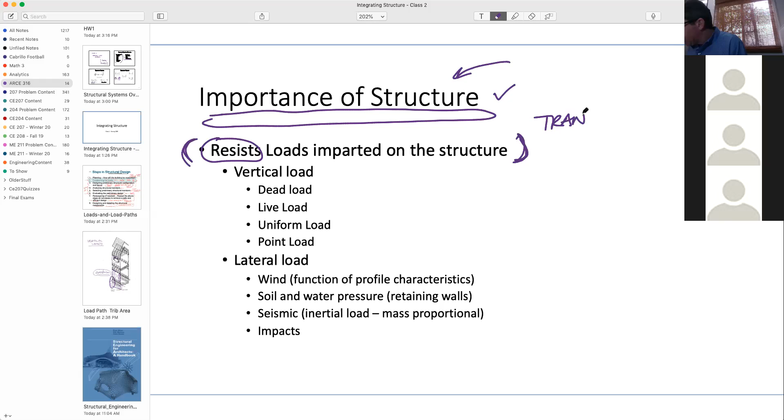Factually, a structure resists loads imparted to it. You could say resist, but really what it does is transfer loads ultimately, and successfully, to the foundation. That's really where those loads need to get to. So think about it in terms of resisting, as in being able to withstand them.

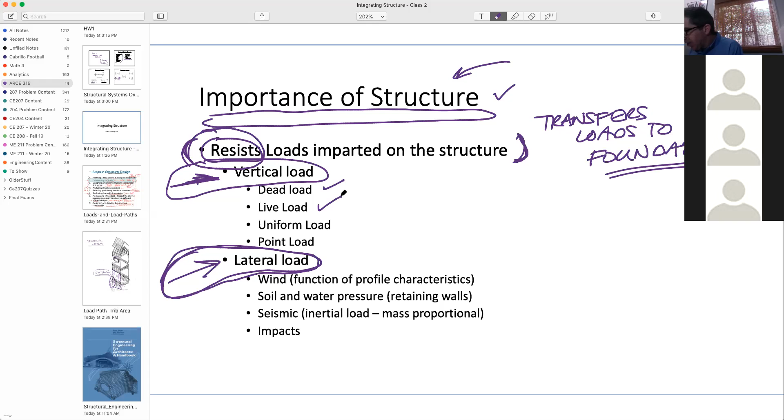Where do those loads come from? Two major components here: we've got vertical loads, and then lateral loads. Homework one, project one, focus on this, but you'll still deal with the other. That won't be something we don't pay attention to at all. You'd be aware of those vertical loads: dead load, live load.

And from a type standpoint, a uniform load. There could be something triangular—you might see that with some soil pressure, also some wind loading. But we end up really using quite a bit of point loads as well.

Lateral loads coming from wind, soil, and seismic—really it's going to be seismic and wind that we're aware of. Vertical dead loads mostly come from the material weight of the building, and the live load comes from the occupancy expected.

Wind mostly being the fact that you can't control where something is going to be occurring, or where the site is—it's really a major function of the profile and what the building looks like in its profile, because wind is defined as a pressure, where that pressure is a force over an area. So the way we get force is that profile, which has units of area, allows us to create the forces imparted to the structure.

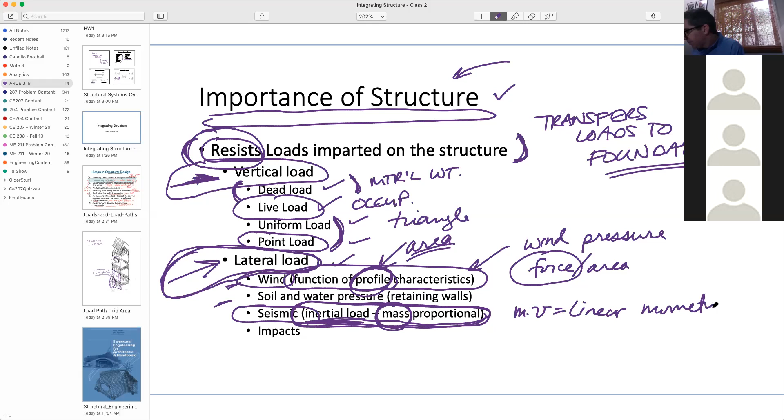So the change in linear momentum, slightly, is the mass times acceleration. So the mass is the quantity that resists the change in linear momentum. That mass is what makes the building want to stay in one spot. And as the ground moves, it creates an inertial force, or an inertial load.

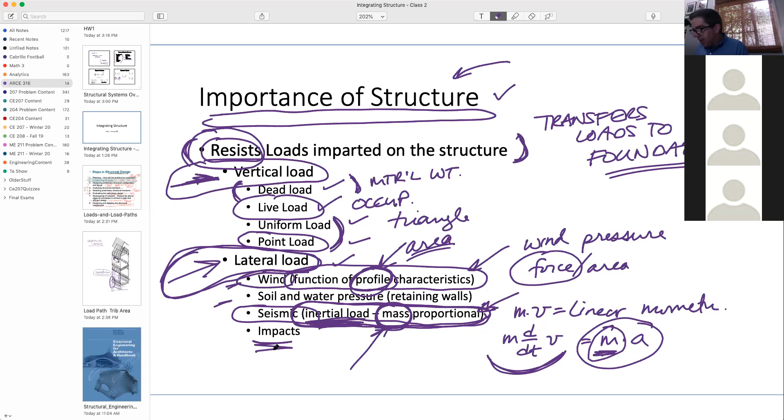So when you have a building with high mass, you end up with high seismic forces, keeping in mind that you can't really control where the site is, and there are all the seismic issues based on location as well. There would also be impact loadings, which we won't really get into a whole lot.

But from that first project, we are going to create load paths and make sure they are well designed. So in a lot of, like in homework one, for instance, a lot of this you'll be told—you'll be given grid spacing, you'll be asked to do something very specific.

But in your projects it's much more open-ended, and I want to get you thinking in that direction, in terms of you need to create a grid, and you need to create some spacing. And the loads that show up, a lot of times we will just end up defining something—this is going to be based on the material choice and your occupancy.

And then there are other loads that may never occur—those wind loads, those seismic loads—you have to design for them. They may only occur once, but once is quite enough. And these loads get into life safety issues for occupants.

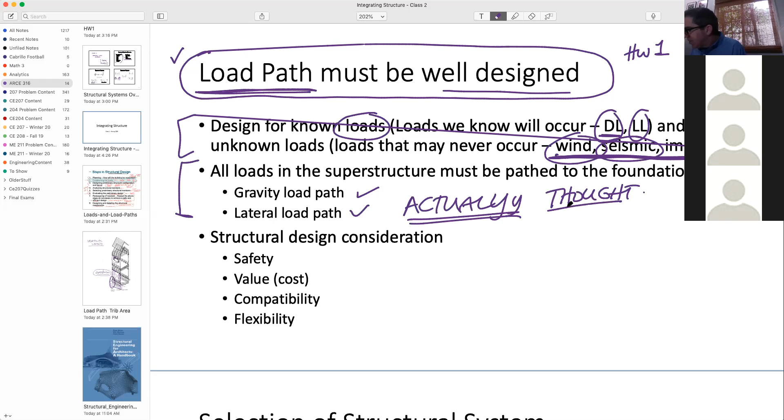So all those loads need to be pathed to the ground. And what I would just say is they actually need to be pathed, not hypothetically—it needs to be thought out. So that's what we will make sure we're thinking about: how do those gravity loads actually get to the ground?

And then also the lateral load—we'll continue to expand on that. So, big picture considerations: safety. I've already said this a couple times, but life safety—not only life in terms of life and death, but also occupant injuries.

If the heating or ventilation went out in a building, nobody would really be in danger immediately of their life or being injured. They'd be able to leave. The issue with structural design is that it can be an immediate occurrence that shows up very quickly without notice, so that's where the issue of safety is much more sudden.

Obviously there's always issues with cost, but I would define value as the comparison of what you get for what you pay for. So there's a cost, which is more of a dollar issue, but value deals with what you get for what you pay for. And that's a component.

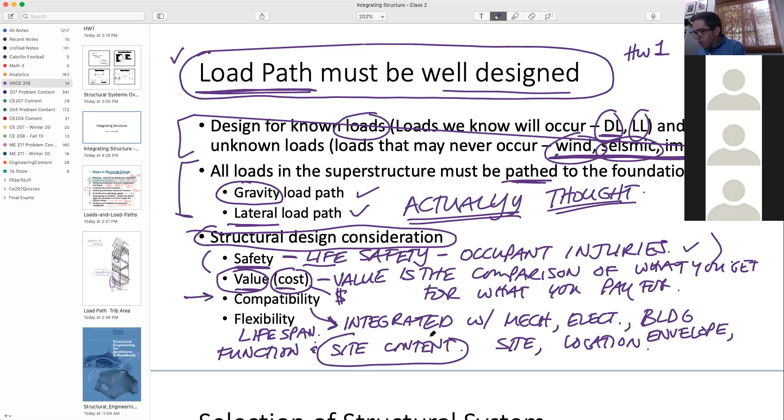Compatibility, right? Integrated in terms of the structure - is it integrated with the mechanical, the electrical, the building envelope? We get into cladding a little bit. The site, the location, that'll come up again. So is it compatible with all those other design issues? And then finally, flexibility. This would be about the lifespan of the building, in terms of changing function and site context - not only the function of the building, but if other things were to show up on the site in the future. So all that comes in with the structural design issues.

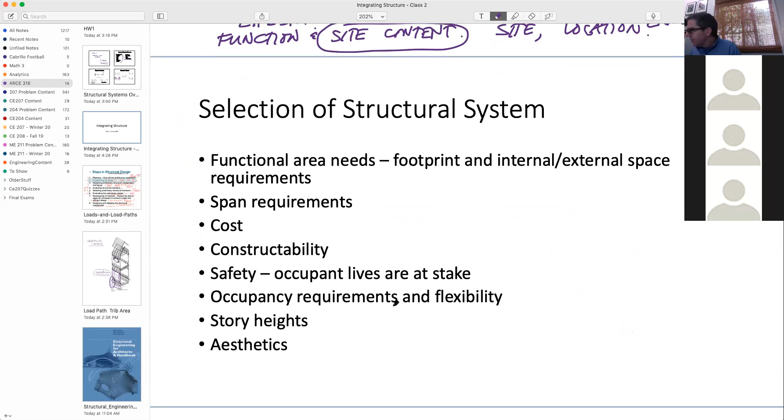So selection - I'm going to bring a couple words in here about what we ultimately want to have happen. We want a system that has integrity, meaning it has completeness. So it's not a little here, a little there, but it has an integral design, an integral completeness.

It deals with economy, and that would also deal with the ability of something to be built - gets down to constructability, which would be both based on the location of the site and the local builders, what they can actually build. And we want this thing to have good continuity, right? Load path in the system. And then another thing is redundancy.

So really that is best defined as: we want local failures, or component failures, to not create global instabilities.

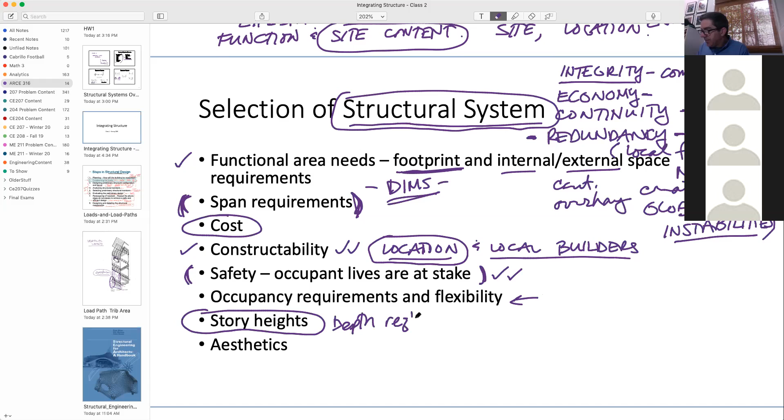There's obviously an associated cost and value, right? The constructability - how is it buildable? Not just because the site might be challenging, but also what might be available in the local marketplace. Safety, again the safety of the occupants, and understanding redundancy. Flexibility. Another one is just story height - this deals with the depth that's required for the elements. And then also the aesthetics is something that needs to be a part of what's going on.

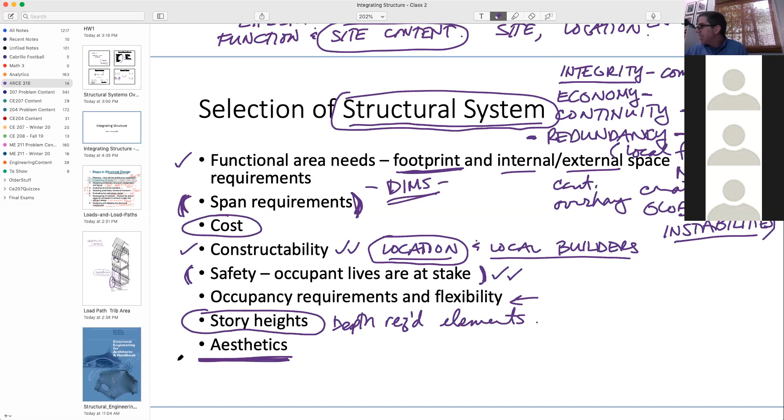I think we want to stay away from the thought that engineering has no ability to be beautiful or should be covered up. It can obviously definitely be exposed. And so, moving on with structural integration.

So I've talked about the issue with design priority, and all those things that you see there vie for design, time, and attention. Dealing with the importance level, dealing with the size, dealing with the span - the things that are desired within the structure itself - that can push structure a little bit higher, or definitely push it to earlier in the process.

Something we don't want to ignore for too long, or you may not be able to solve an issue or build it. So it's something that vies for the attention, and really the reason why is that these things really can't be ignored.

The issue of where this thing is located affects the wind, the seismic forces. The site conditions - we don't get into this a huge amount, but this seismic calculation goes down to local factors, like the local soil, and you end up with soil structure interaction. The topography of the site, if it's a hill site or a flat site, the local construction, the space requirements based on what's needed inside, and then this load path need that needs to be satisfied. There are rules, there are basic foundational principles that need to be dealt with.

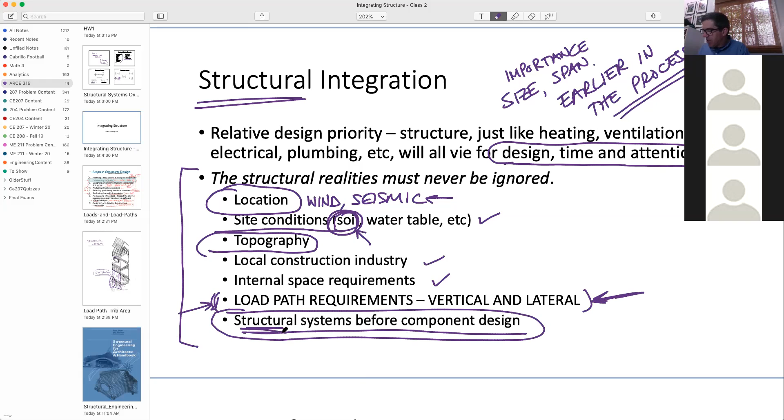Structural systems before component design - before we can get to designing a component, we need to make sure we've got a structural system. So a lot of the homeworks, like homework 1, you're told to use steel or concrete. On project 1, you'll be able to decide what you want to use.

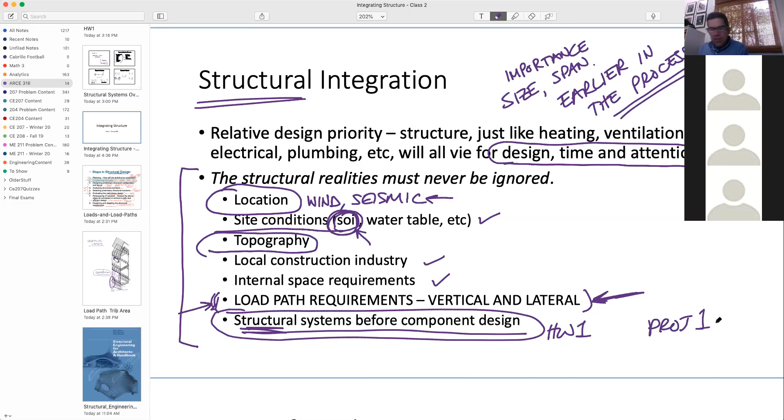So just kind of bringing into focus what it is that you'll end up doing in this class - how you'll end up doing it. You will end up creating study models, your wood cardboard combination. You can end up laying out these things. You'll be making the decision where the column grids are, therefore based on span, then what your girder depths need to be, what the lateral system, what the distribution is, and what type of system you use.

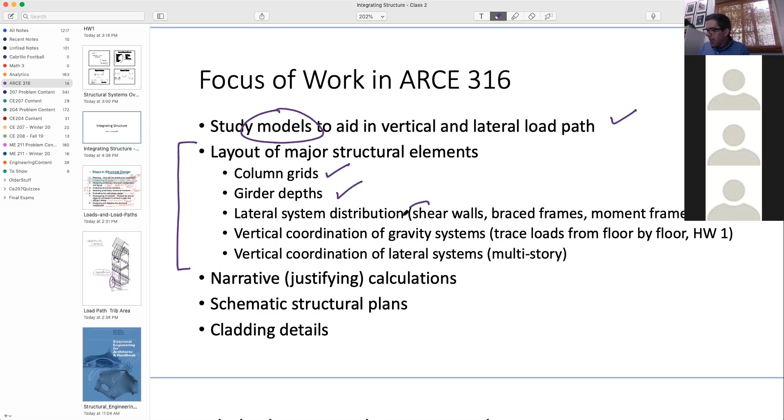If you're going to use shear walls, brace frame, moment frame, the vertical coordination as loads flow through, and then the same thing with the lateral system. So that's really what this will at first have you be doing, trying to take your project, your architecture project, and fit, make sure structure is smartly brought in.

You'll end up with narrative calculations, justifying calculations. So you'll have to do some amount of that. It won't be too heavy there, but you'll be able to manage that. Something else that will keep coming up is just the use of units - I'm going to make sure we do that. You'll end up with schematic structural plans, and then later on in the class we'll end up with some detail work as to how we're going to hold some of that cladding on the building.

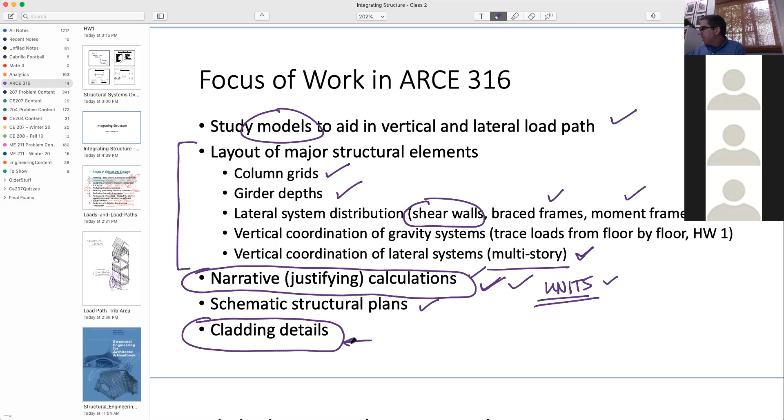So then the last one here, and then we'll take just a little bit of a break - this idea of global versus local structural issues. When we get to this project one, you're going to deal with global issues first. And then once we've got our global issues worked out, then we get down to the local, or the component level. And so you'll be using rules of thumb for sizing.

Up here on the global issues, using the whole building, considering the building as a whole, vertical loads need to be dealt with from a global system. Span requirements, dead load, live load will need to be set out. So when you make your material selection, that then triggers what you're going to use for the dead load. When you have an occupancy, that then triggers the live load issues.

And keep in mind that lateral loads, I think, are even harder to appreciate - certainly they're harder to see or feel. Generally you want to avoid, it's always better to avoid strong wind or seismic, but these are things that may never happen, hopefully. Those deal with the stability and life safety issues. So that's why the completeness of load path is extremely important as we get to designing some of the elements, but we will make sure that we have a complete and integrated system for both vertical and lateral loads.

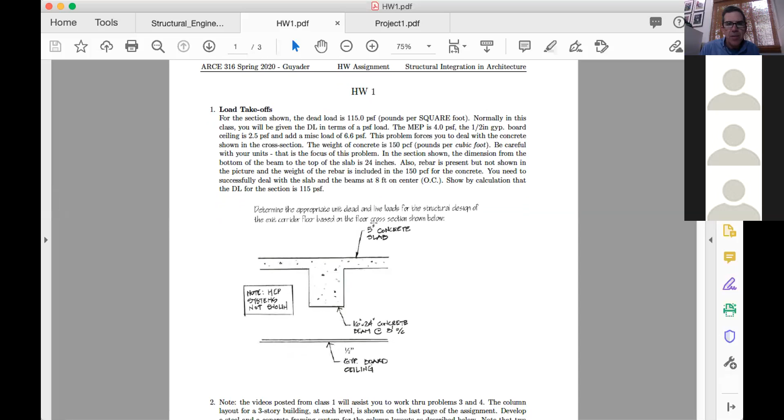All right, we will take a look at, it's on Canvas as well, but I will just share the screen here. So I'm going to talk through this with you. So homework one, you want to kind of think of homeworks as being a little bit of exercise wise. They'll always be due before the projects.

So what I did is we've got a little bit here - I'm trying, I've actually laid out, this problem came from one that was a lot longer, and all I've done is actually told you what the final answer is and given you some values for other loads. So I've told you how much the ceiling is, the mechanical, which isn't shown, and then a miscellaneous.

And so all I'm trying to get you to do right here is deal with the slab and the beam right here. So I kind of lay - one moment, I got a hand, just a moment.

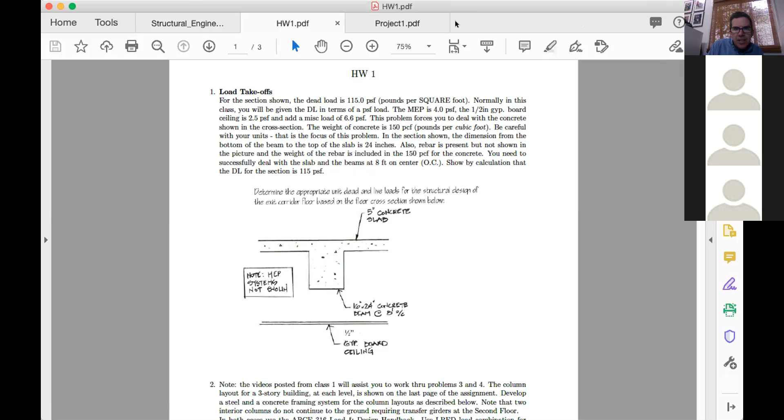I didn't see the homework in Canvas yet. It will be there right after. Oh, actually, you know what? I know what I did. I'll do it right now. Actually, I probably don't want to do this in front of you, it might look a little weird. So I'll do that right afterwards. Thank you.

All right, let me get this out of the way here. All right.

What I'm trying to get you to do is go from pounds per cubic foot to pounds per square foot, so you have to deal with the dimensions and thicknesses. This one deals with a 16 by 24, and I write out here that the 24 goes from the top of the slab all the way down to the bottom of the beam. That one's meant to be quick, but I'm forcing you to get into the units, because that's going to continuously come up when we go from pounds per square foot to pounds per lineal foot. That'll show up on a beam.

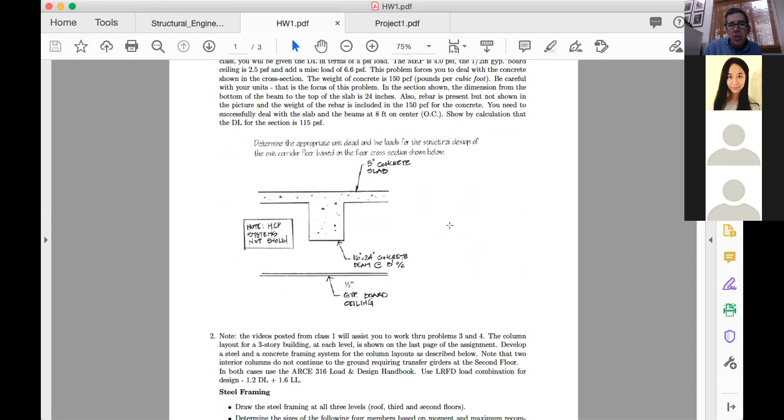Number 2 and 3 - this is, shoot, anyways, I'll fix that as well. Let's just say problems 2 and 3.

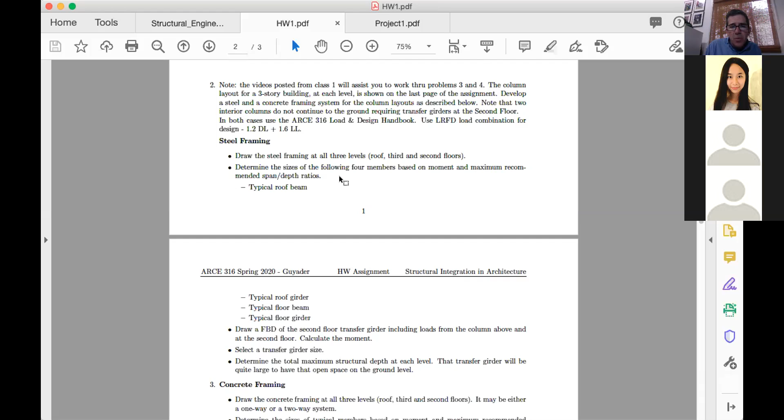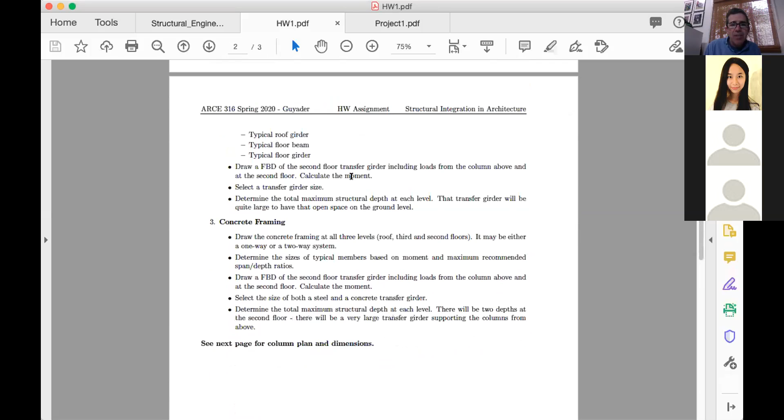So what I'm going to do really mimics what I did in the asynchronous material, where I did some beam sizing, both for steel and for concrete. So let me go ahead here.

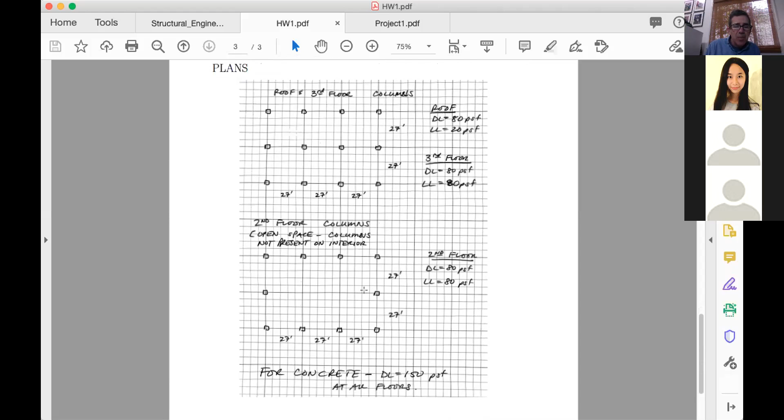It's a 3-story building, and the roof and 3rd floor have plans like this. This would be the 2nd floor framing. The only thing to highlight, and I make good note of it, is that those columns do not go all the way down to the bottom. So on the bottom floor you've got a huge open space, and you end up with big girder loads down there. So just think about load flow as you work your way down the structure. The transfer girder will be quite large on both of those plans.

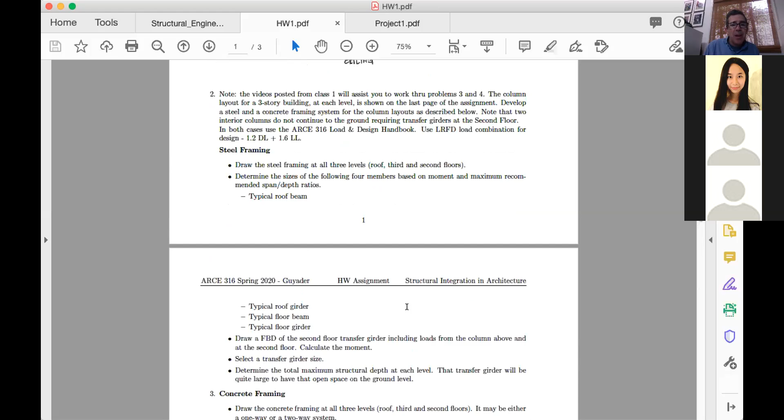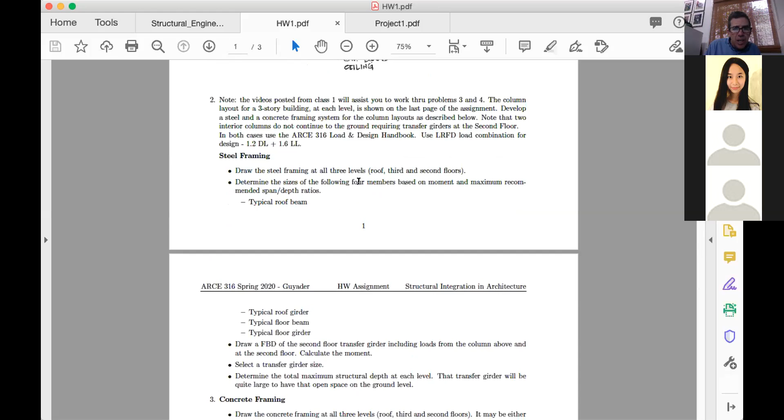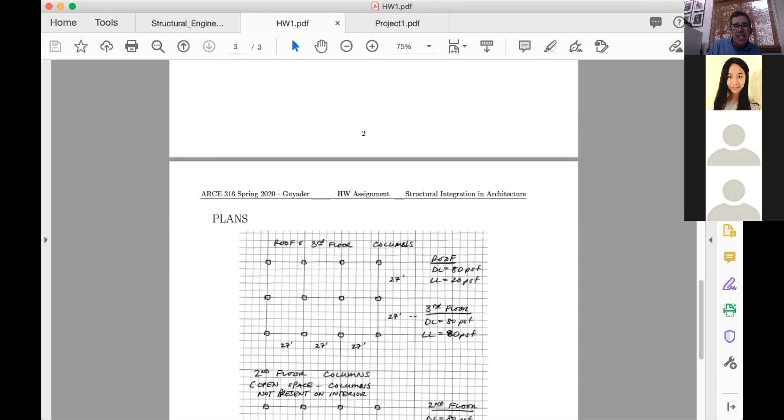Something to keep in mind as to what I've got you trying to think about - this really you'll use LRFD, so that'll be your load combination. I also give the loads right here, the dead load and live load that shows up on each floor. For concrete, we'll just take the dead load to 150 pounds per cubic foot, so we're already in an area load here. I think this is just meant to get you going in the direction for the project. So let me get that project up here, a little bit smaller.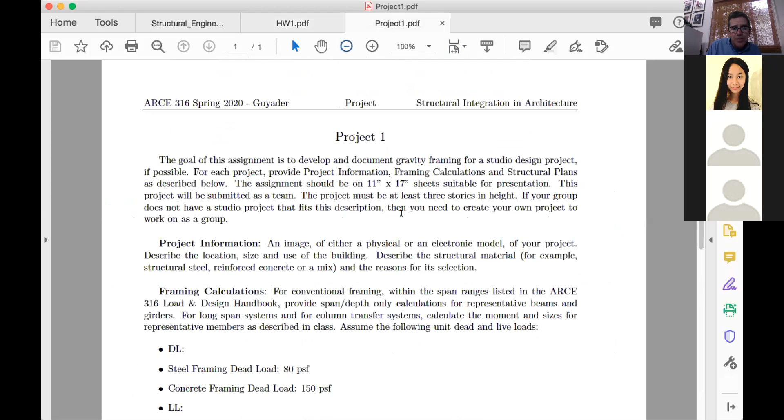All right, now I've created groups, and we'll go over that in just a minute. You'll end up in groups of about three or four, and we'll talk through that. Let me just hold on here for just a minute.

This is about a 2-week project, and we're going to develop the gravity framing, hopefully for a studio project if possible - we might not be able to do that, but we'll work through that here. We'll have some project information, and you'll end up doing this in a couple of different iterations. You'll end up with some framing calculations, and also some structural plans, using that 316 handbook with the load and design, dealing with span and depth calculations.

You'll end up either using a project in your studio, or in your group - you could just make a project up in this regard. From a creativity point of view, I don't want a box. I'm looking for something that is much more creative.

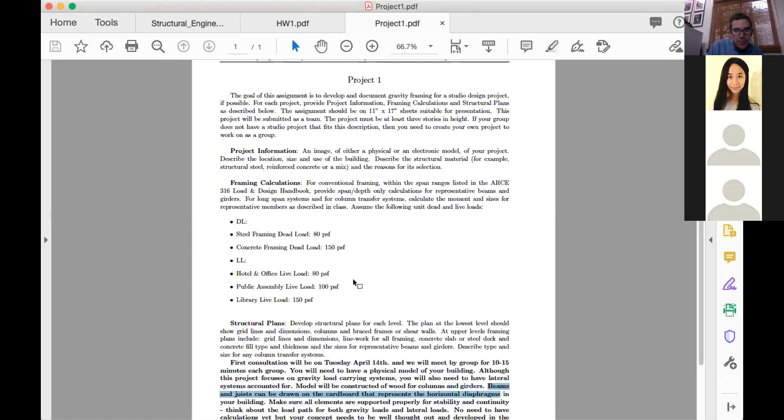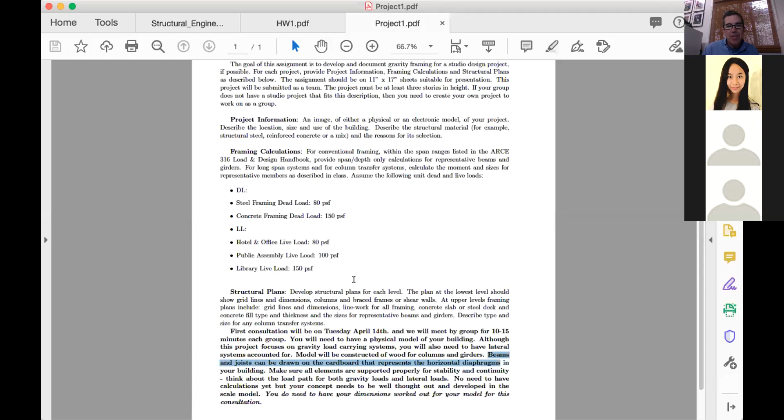In terms of what this is focused on, it's mostly framing and spanning, but this might be the first time it's open in terms of what material and how you're going to span, and what your spaces look like. That puts in your lap the decisions of what material, or even how you're going to end up laying out your grid system and how big that space looks like.

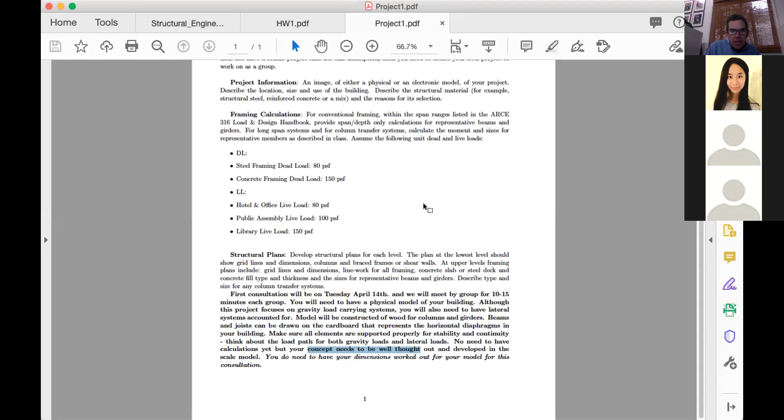So we want to make sure elements have stability and continuity, and the load path. You won't have any calculations yet for next week, but your concept and your paths need to be thought out and developed. I'm more than happy to talk about more than one concept in a group if you wanted to throw around different things, like if people are working on different projects, and then in the end it'll end up being one project that you guys submit. So I hope that makes some sense.

I'm gonna unmute. Actually, hold on a second, give me one second here. Maybe about one more minute. Yeah, there we go.